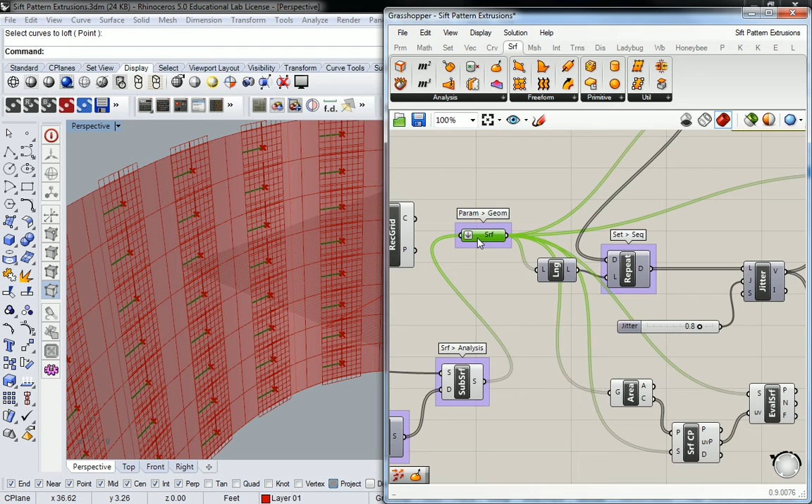First off, I'm going to show you a trick that's going to take this surface output and basically allow you to package different groups of information and not worry about all these wires going everywhere. So here is what I do. First off, I'm going to pull this backwards a little bit. Put it like that. Actually, we don't even really need that stuff anymore, but we'll keep it there anyway.

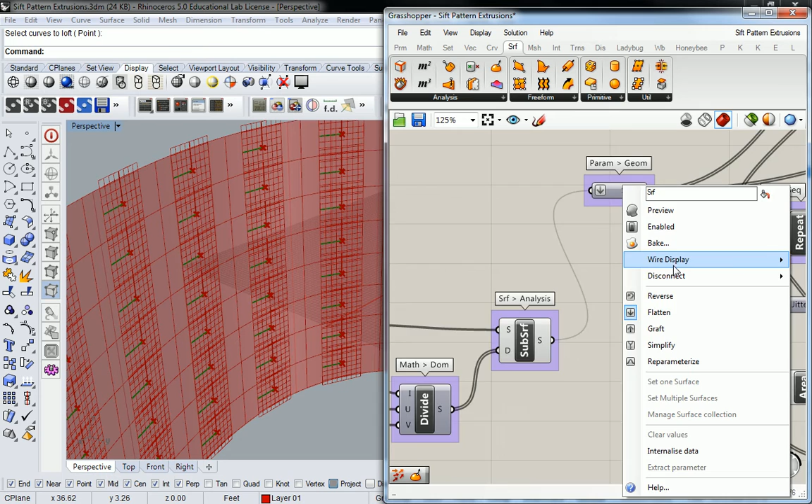Did I show you guys the wire display yet? No. All right, this one's super cool. So these wires that we're connecting things with can be turned off. I mean, you can sort of make them less visible. Hold on, let me pull this over a little more. You can make them less visible by putting it on faint, and then it doesn't really disturb your eyes so much. That's one option. But the option that I really like, particularly when I have one value that's being plugged into a bunch of different places, is wireless.

And it's going to look like this, and then I'll show you the better way of doing it, but it just totally disconnects it. But that's not the one I really want to make wireless. Let me go back to default here. What I like to do is connect two params next to one another and then make a wireless one. So this one right here, I'm going to rename this. Make sure I absolutely know what this is when I plug it into other places, so I can connect the dots between my different wireless elements. So I'm going to call this base surface. Actually, you can call it base curved surface or something like that. Something that's going to describe that surface to you.

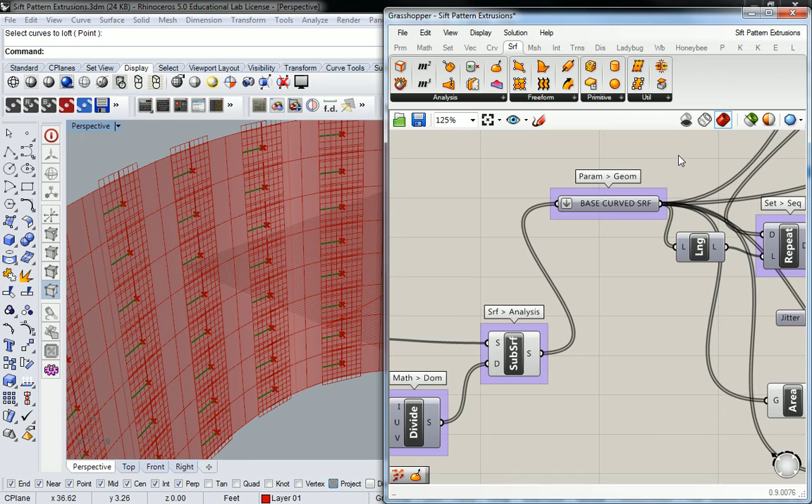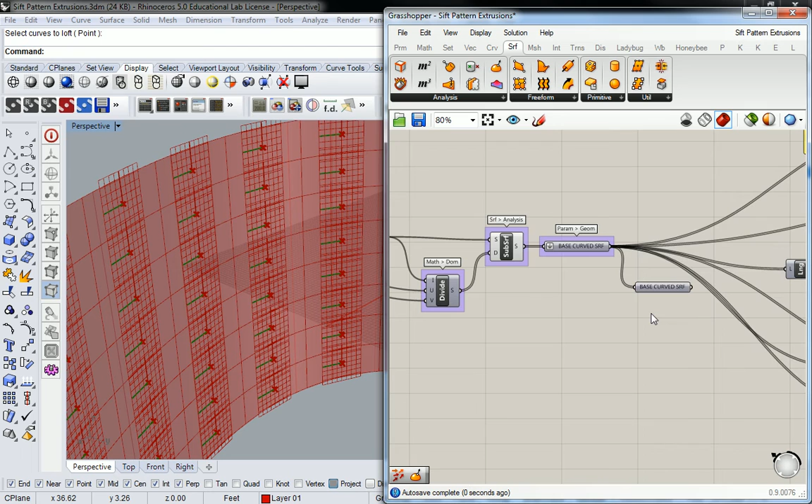So let me give myself a bunch of room here, and this base curved surface I'll pull back, and I'm going to make two of them. Copy, paste, and plug this one in right here. So it's kind of duplicating information, but don't worry about it because this is going to be our wireless connector that I'm going to override things with. I'm going to just turn off flatten because I don't need it. It's redundant. Anyway, make this one wireless. Like that. So now anywhere I move this, even if it's over here or at the end or 1,000 feet below this part of my definition, I know that it relates to that base surface. Okay.

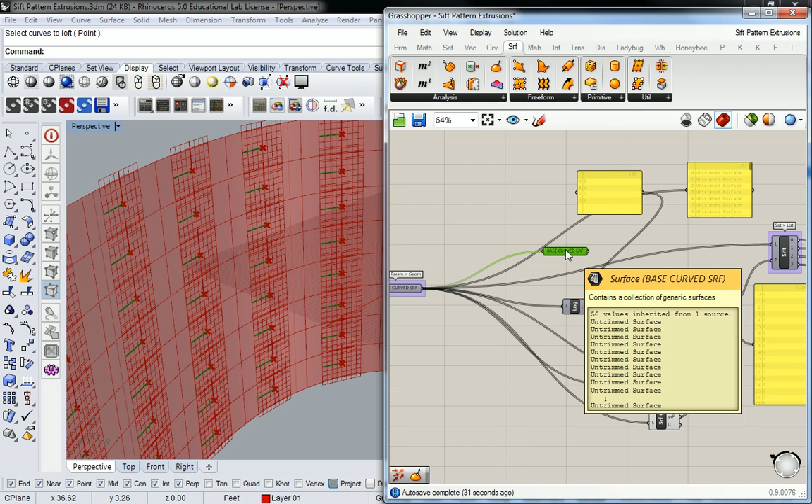Now, I'm going to go through the process of segmenting and separating all the things that I'm doing. So first off, this set right here is my new set. So I'll pull this down a little bit and separate it and pull a base curved surface there. And then just reconnect all of those connections to each one. So that means I can connect this to G, this to S, and this to S. And now that becomes a totally isolated system that when selected still relates back to that base curved surface right there.

I took these and I just pulled them down. Then I took my wireless base curved surface and I just reconnected all the surface inputs. So it functions the same way, but now I'm free to take this element and just move it anywhere I want. I could put it down here in a totally different place in the workspace, and it still relates back to it via this connection. Okay?

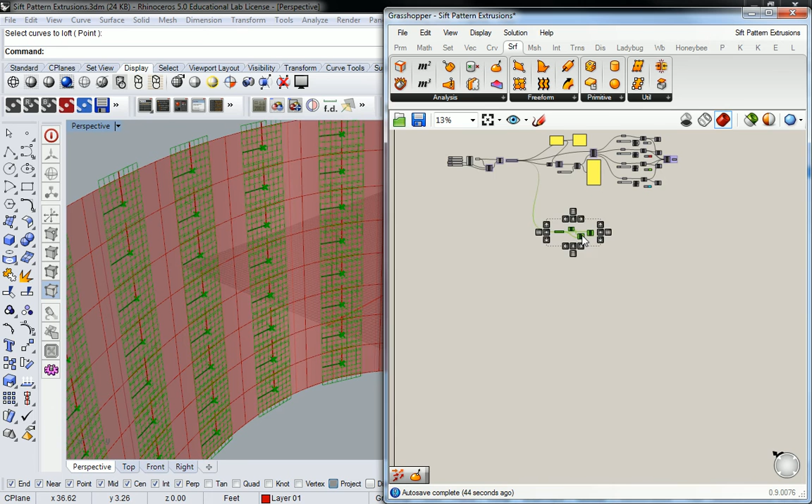How do you make it wireless? Right-click and click on Hidden. Wire display, and then go to Hidden. All right, so that's one of them. The other one that I want to do here is to clean up this so that I can box it together, make a clean group, and then plug it in here.

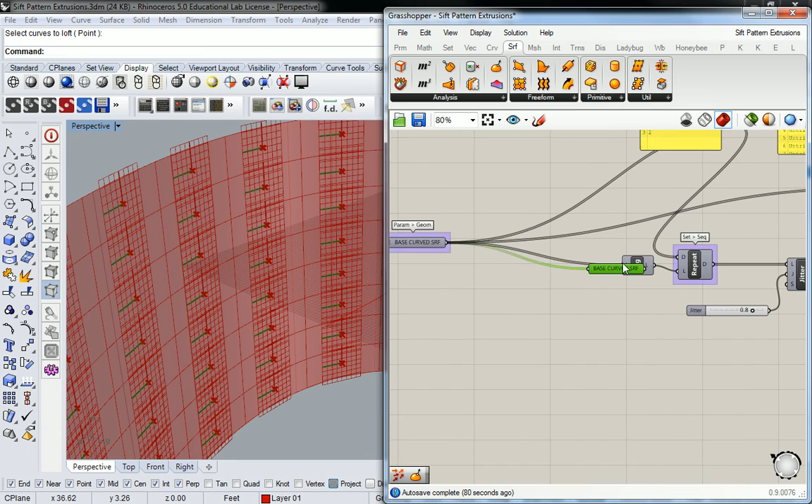So that it just does exactly the same thing here down there. Okay, so I'll take another one of these curved surfaces and start replacing these connections as well. So I know that the surface is connected to this and that and this. You copy again? Yeah, I copied this one and just made another one up here.

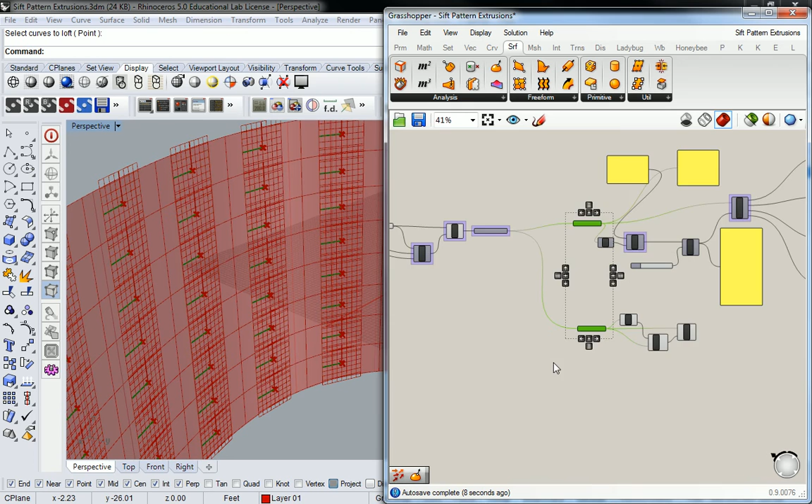So when you look at them side by side, those. So I'm going to let you catch up and stretch this out here, but this is what you should have. Okay? Base curved surface, that's this. After it's been subdivided, that's important. And then I put it down here and subdivide all that.

That's ready to go. And then base curved surface here, and I have replugged it into all of the panels and the repeat data and the SIFT pattern that I used previously. Making sense? I'm going to give you a couple minutes and make sure you're ready to go before I continue. Yes. All right, guys, so moving on.

Now it's time to clean up that stuff above, okay? Yeah, no, it's a little scary. So to recap what we did, just so you know what we need, what we don't need, right? We have these base curve surface subdivisions right here that we needed to restructure in order to create separate packages of information that were going to get sifted out into different groups that I was going to extrude at different values and color with different colors.

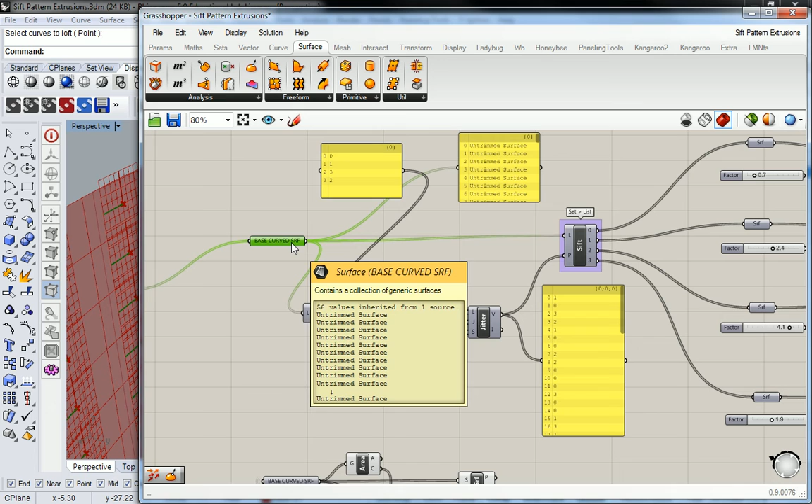So we need to do this same operation in the same way, but with vectors instead. So a lot of this stuff right here that you see is just monitoring. I'm just trying to see how information is being changed. So remember, we have the repeat data. We created a pattern, 0, 1, 3, 2, right? Then we repeated it enough times as we had surfaces.

Then we took that whole list here and we jittered it and just shook it up. Then we put it back into the SIFT pattern. And then 0, 1, 2, and 3 got broken out into groups in their reordered position. Okay? So it just used this pattern to break up the groups of surfaces and then split them. So conceptually, that's all it did.

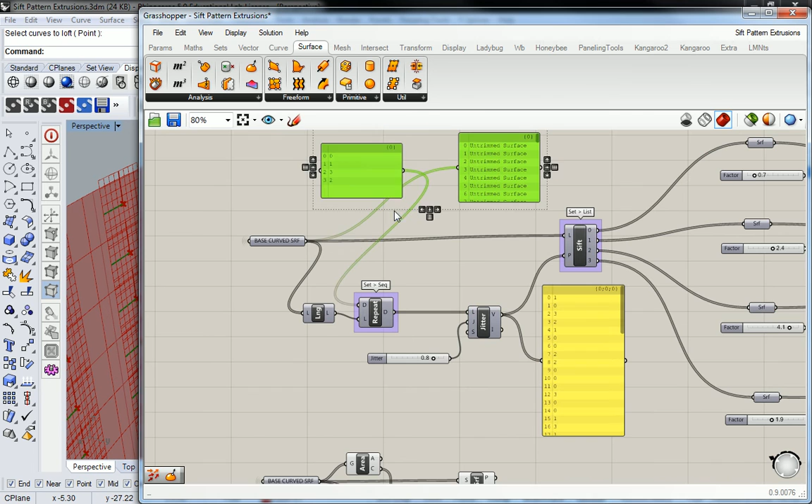So all of these panels, we don't need. It's just so you could see the information. Wait a minute. Oh, sorry, we need that one, because that's our base pattern. Even I make mistakes. All right. So I'm going to put this in here all nice and neat. Just clean it up, make it look good, because that's what a professional does.

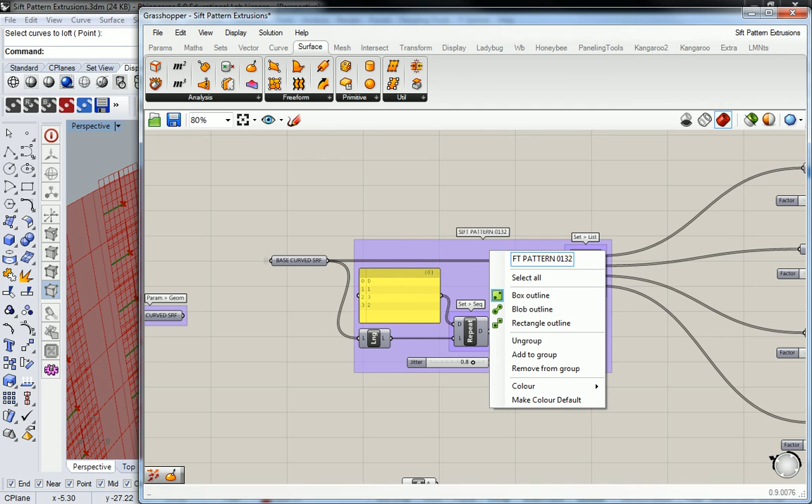And then I'm going to take this whole thing, copy, paste, oh, sorry, group it like that. You can name the group if you want. Oops. 0, 1, 3, 2 was my pattern. So I'm going to make sure that that's visible. What if my thing turned red? You may have just deleted something and it's not calculating. I'll get right back to that. Okay.

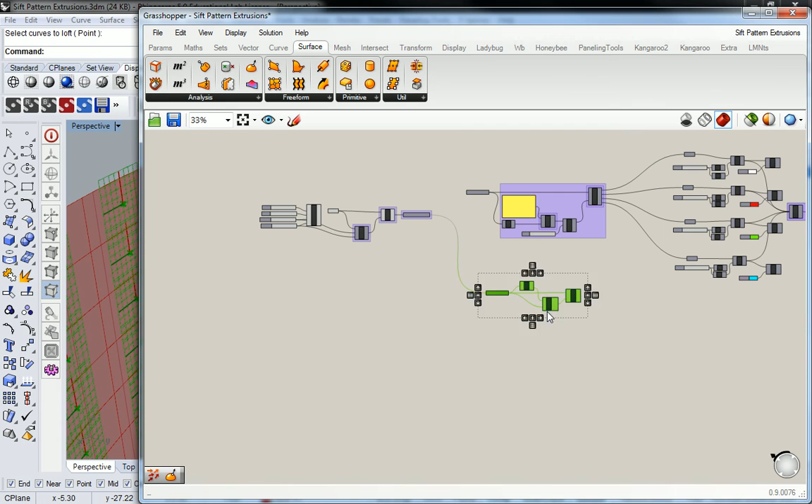So, green flags. You guys are generally green flags at this point. All right. Well, I'm not doing anything crazy, so I'm going to continue on. All I'm doing here is I'm taking this function. Right now, this is a function, and I'm going to copy and paste it down here so that it operates on this one as well. And you'll notice that it keeps all those old connections, right? You just need to replace those with the new information that you're trying to reorganize.

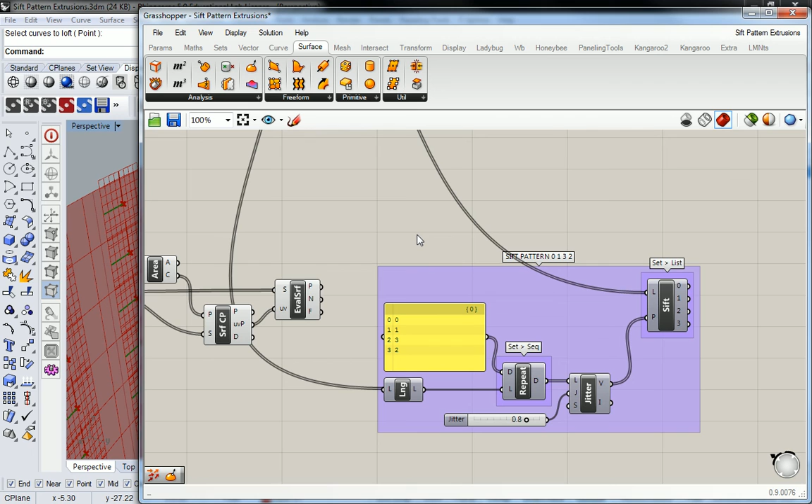Okay? That would mean the normals, right? Each normals are these, right? So if this is a normal that's assigned to a subdivision that falls into group 0, I need to make sure that goes into group 0. This one goes into group 1. That one goes into group 2, right? So that's why we're doing this. So these normals get plugged into list length. They also get plugged into L.

And then you should theoretically be able to start replacing 0, 1, 2, and 3 into the Z value. But don't do that yet, because we need to go over how you apply magnitude to it now that it's just a pure direction vector. There is no magnitude. So we'll do that in the next video. But let me make sure you guys have this before we do that.

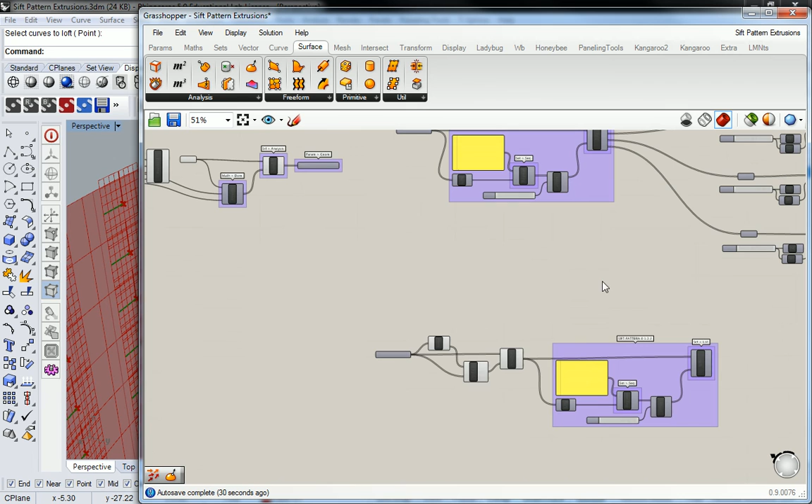And let me move this back here so it's a little more clear. Get that out of there. Okay. So this is what you should have here. It should look like that.